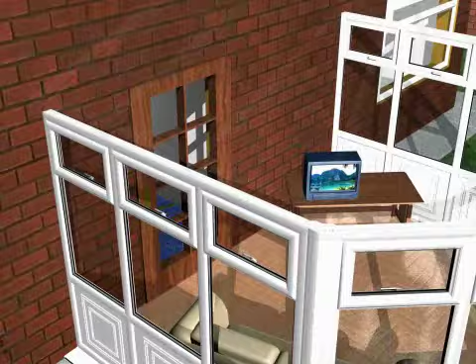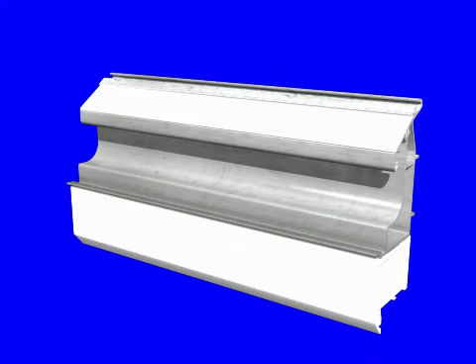The Global conservatory roof system has been designed to suit all PVCU profiles available on today's market. The flat base on the eaves beam will sit directly onto any outer frame section between 58 to 70 millimetres. The eaves beam is sculptured, producing an exceptionally robust product capable of withstanding all design and loading situations.

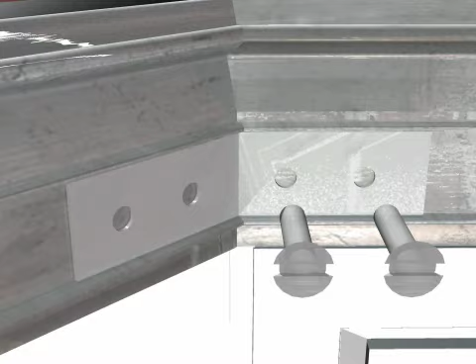Once this box section has been screwed onto the walls of the conservatory, the corners are securely fastened together with the specially designed fixing cleat.

The global ridge component enables all pitch variations between 15 and 35 degrees without the requirement of additional components. When the ridge arrives on site, there's no assembly required, with the exception of the cappings. It simply locates ready to receive the glazing bars.

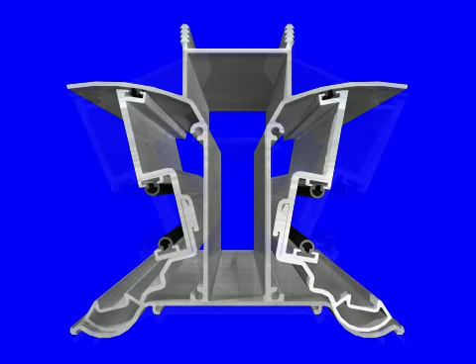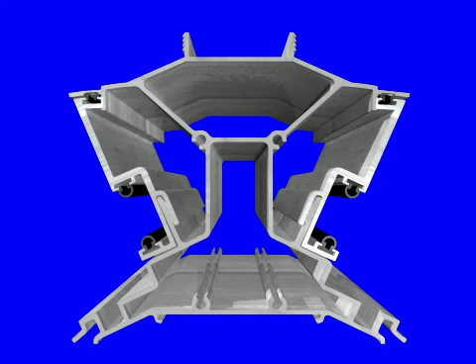Due to our extensive experience in the conservatory market, we've identified that the vast majority of conservatories are on a 25-degree pitch. The Global conservatory roof system also boasts a fixed ridge section to make the fabrication and installation of this product even simpler.

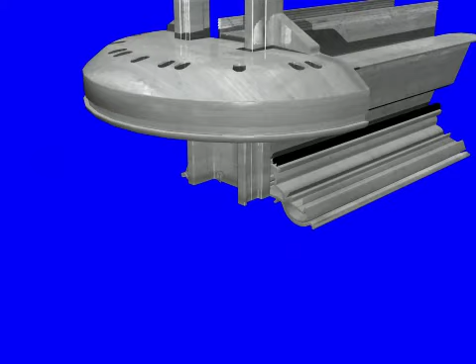The aluminium radius end, spider, is equally effortless. Not only does the same component house the hip bars on any pitch and any style of conservatory, but the precast location grooves eliminate the necessity to drill this component at either fabrication or installation stage.

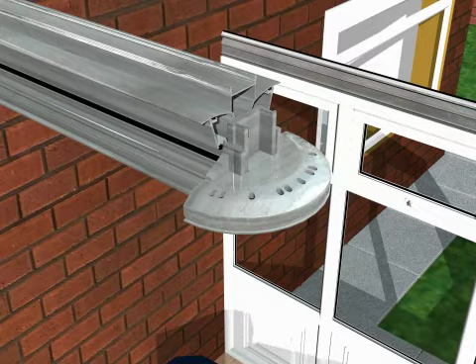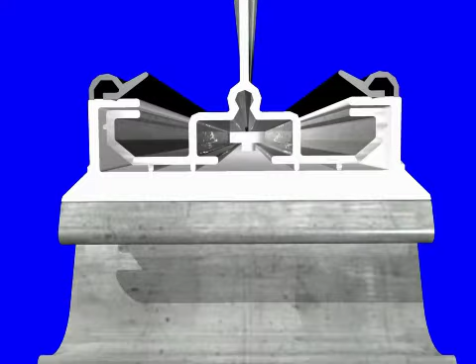Once the beams have been positioned, locking off is simple. The installer simply fastens one nut to the top and bottom of each beam from inside the conservatory, again eliminating the necessity to physically climb on top of the building and reducing installation time still further.

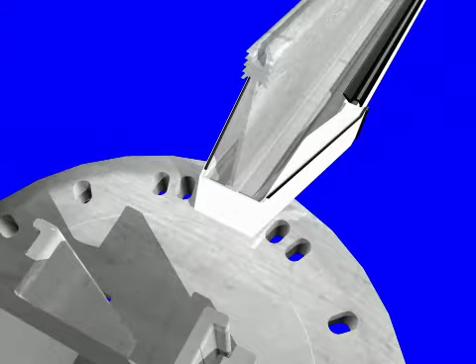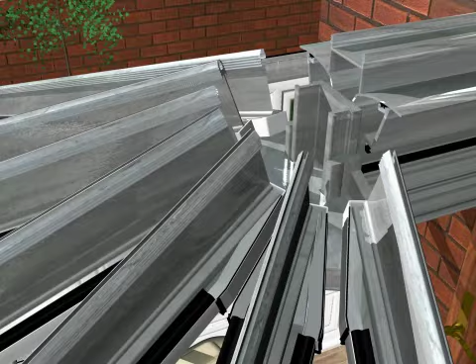As the ridge and radius end both house a location groove, the major benefit is that the installer can locate the glazing beams into the ridge and radius from floor level, meaning he does not need to climb up onto the half-built conservatory to position the beams. This central bolt slot on the glazing bars also eliminates factory or site drilling into the aluminium section, cutting down even more time and cost.

Once the beams have been positioned, locking off is simple. The installer simply fastens one nut to the top and bottom of each beam from inside the conservatory, eliminating the necessity to physically climb on top of the building and reducing installation time still further.

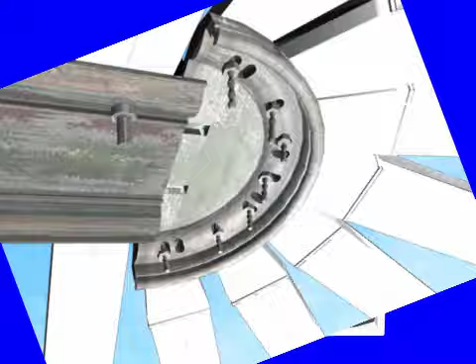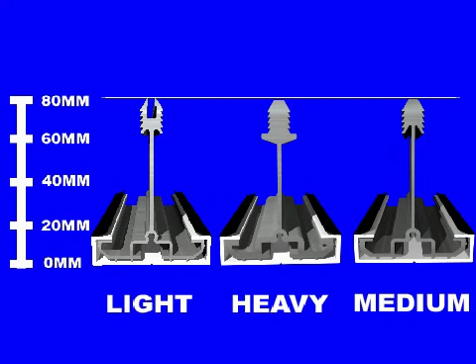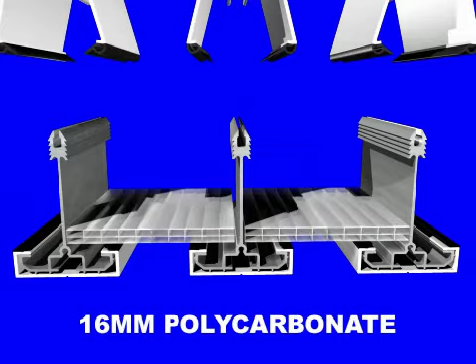Glazing beams are available in 3 different weights: light, medium and heavy, with an additional underbar bolster for the extreme. This range of aluminium weights ensures cost efficiency for all size conservatories. The height of all gauges of rafter are a universal 80 millimetres, allowing for cross-utilisation within the same building if required. Polycarbonate depths of both 16 millimetres and 25 millimetres can be utilised within the conservatory system. The global roof can also accept glass panels when required.

Because this roof offers a specific jack rafter section, a sculptured top cap on all glazing bars can be used without complicated milling procedures at the jointed section. The top of the jack rafter stops at the bottom of the sculpture on the hip bars.

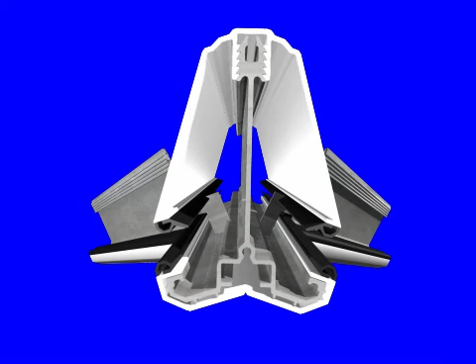The easy technique by which the rafters locate to the ridge is replicated with the jack rafter assembly to the hip bars. The simple spring hook design enables the quickest of installation times once again.

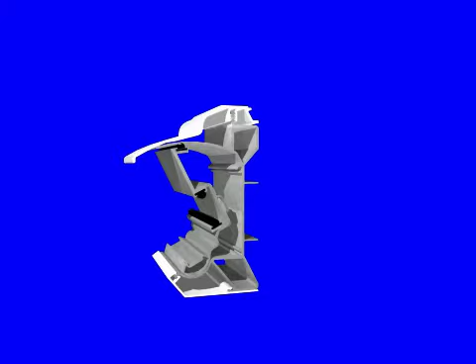A global wall plate is an exact 50% replication of the ridge section. This means that the benefits incorporated within the ridge component are carried directly into the wall plate. Because of this, all P-shaped conservatories can be fitted retaining continuous sightlines along the ridge and wall plate.

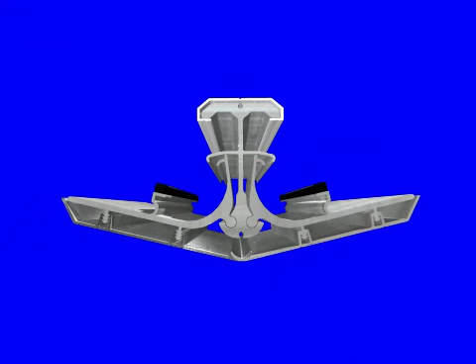The valley gutter is capable of producing all popular pitch and angle variations without jeopardizing either the weatherproofing or structural integrity.

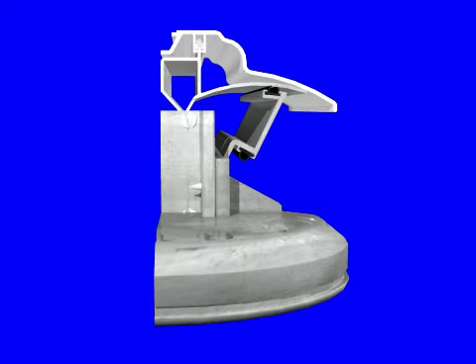The radius end product demonstrated earlier on the ridge section offers the versatility of being able to double in both half-spider and full-spider conservatories. Screw ports in the wall plate have been positioned to fix a split radius end for the quarter-spider installations.

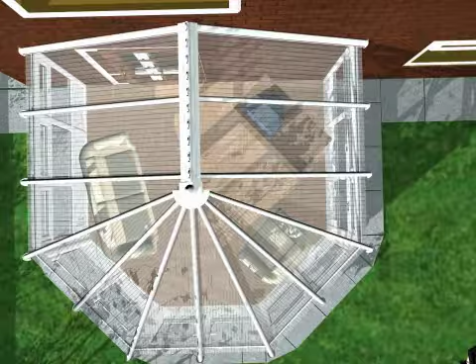When a conservatory roof pitches towards a wall, it does of course necessitate a box gutter system. The Global box gutter duplicates the shape and size of the eaves beam entirely, resulting in a seamless internal joint. The sculptured non-handed gutter system does not stop to meet one of the myriad of box gutter jointing adapters. It simply runs straight into the universal box gutter adapter.

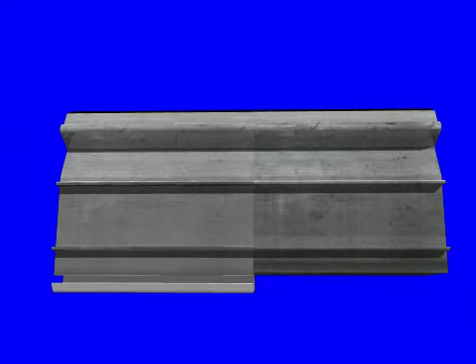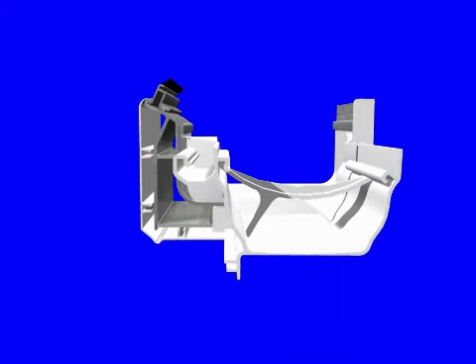This design enables the use of standard gutter angles to be used where the box gutter meets the conservatory gutter, whilst the high-capacity box section can carry water from both the conservatory and house roof. The box gutter also incorporates a twin-layered aluminium base, ensuring that at no time does rainwater actually come into contact with a single skin of aluminium to the inside of the conservatory, which would increase the risk of internal condensation.

Occasionally, high internal edge box gutters are required, at which time antiquated roofing systems need to cloak the welded high internal edge with foam trim products. The Global conservatory roof does not require these third-party products to produce the required finish.

The box gutter underclad is designed to interlock into both itself and also the eaves clad, meaning the perfect finish can be achieved upon any height.

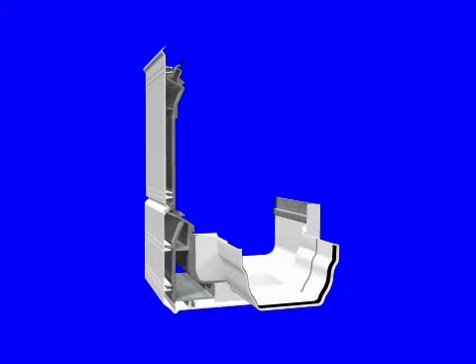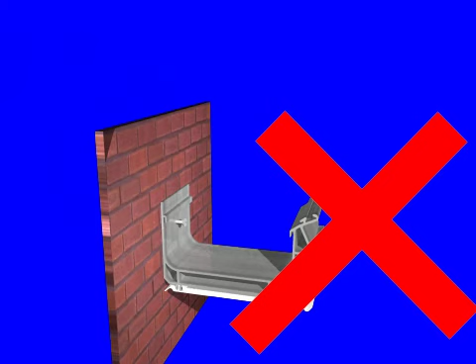Historically, box gutters have been fixed through the external skin of the box section. This not only produces extra leak points, but, as you may already know, causes many headaches for the installer trying to drill and apply a fixing at such a tight angle, especially with a high-edge box gutter situation.

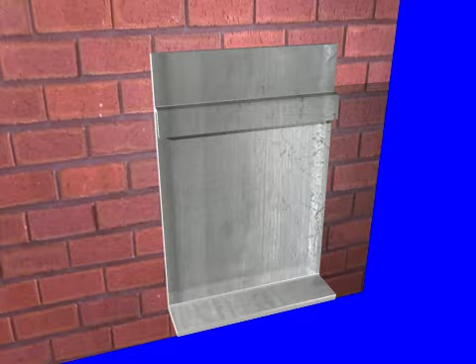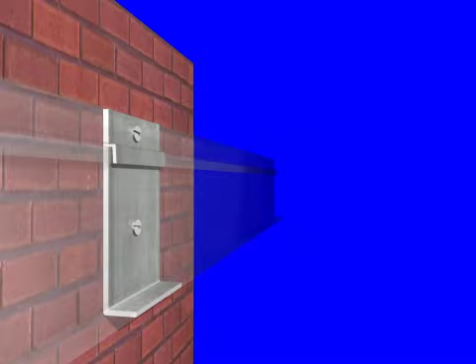Global has challenged many typecast methods, one of the results being a box gutter fixing plate. The plate sits on top of the frames while simply being screwed directly to the wall in as many locations as necessary. The box gutter then clips into this plate with a simple securing screw from beneath. Far quicker and easier to install, whilst producing a box gutter without holes and less leak potential.

Polycarbonate sheeting is fitted into a triple gasket seal at the ridge and sits on the top of a double-sided security tape polycarbonate support trim between the glazing beams. The caps are then simply tapped onto the aluminium glazing beams.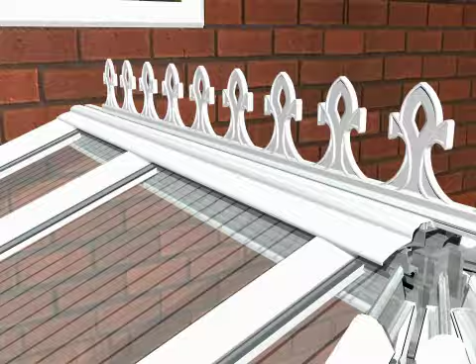Once the interlocking cresting has been slid into the deep internal recess, the wide thread under the finial is securely located into the radius top cap. At no time do these products penetrate these claddings, increasing the risk of water penetration.

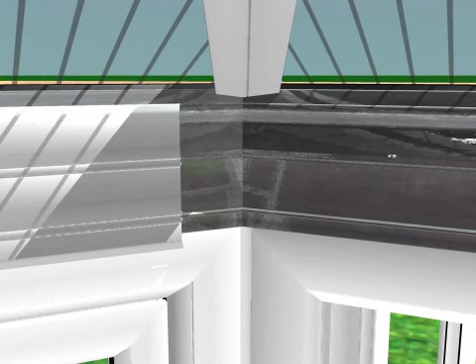Eaves beams are cladded by pushing the trim into position and simply slotting into specially engineered corner mouldings. These provide a dry seal without fiddly mitre cuts.

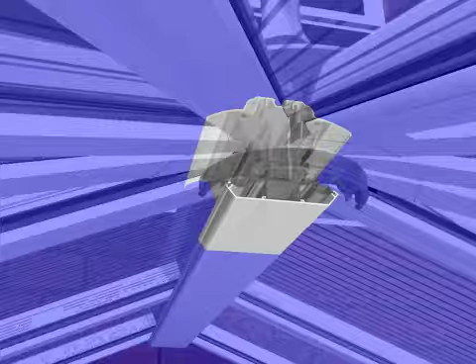The ridge bottom clad fastens in a very similar manner, cloaking both the ridge section and the intermittent U-channel that can be used for fixing tie bars, lights, fans, etc. This one underclad is designed to work on all pitch variations.

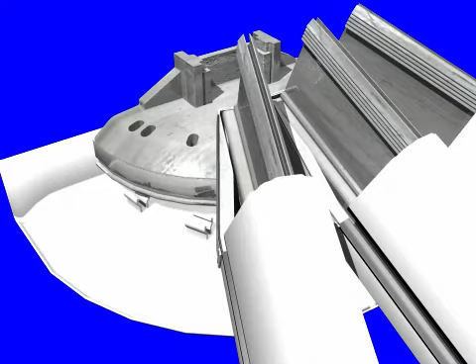Next is the radius end cap, incorporating two locating positions, one for 25 degrees and below, the other for over 25 degrees. Again, simple design techniques eliminating unnecessary products, stock holding and confusion.

Now the conservatory roof is installed, leaving only the guttering to install. This is an area frequently overlooked by alternative roofing system manufacturers, simply making their product suit a proprietary gutter brand, resulting in awkward gutter brackets and imperfect finishes.

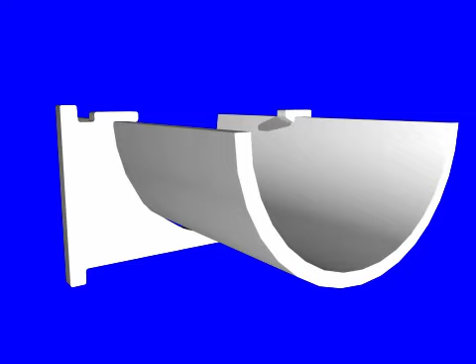The global guttering system is designed and extruded specifically to fit the global eaves beam. The unique global guttering system does not require any such brackets, as it incorporates a simple swing-fit design on the extrusion. The installer simply offers the gutter to the eaves beam at an angle and pulls it down into position.

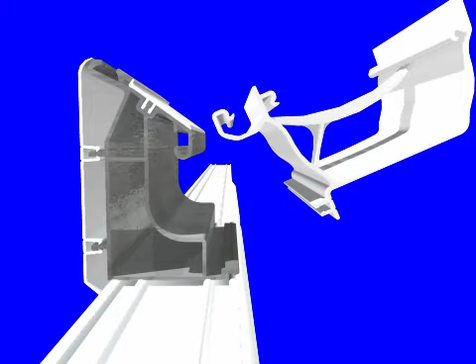Simple. This design not only increases the ease of installation, but also automatically cloaks the often overlooked area of the eaves to frame, producing a perfect finish on a component that frequently lies at eye level. Of course, this means that there are no visible gutter brackets, giving clean and continuous sightlines around the whole conservatory. The gutter then interlocks into the corner mouldings, replicating the perfect finish, even in what others consider problematic areas.

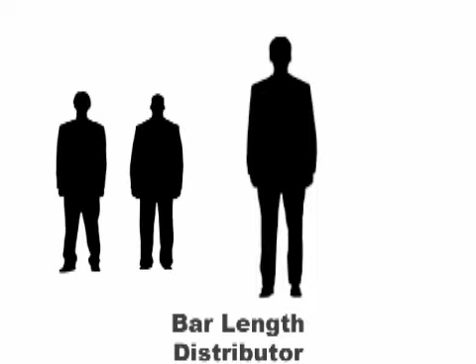Cut out the middleman and make more profit. It's one of the best known and most accurate business principles. The words of wisdom carry even more weight when you cut out up to 4 middlemen in the supply of one single product. This is how the global conservatory roof system discounts another old theory that cheap prices lead to cheap products.

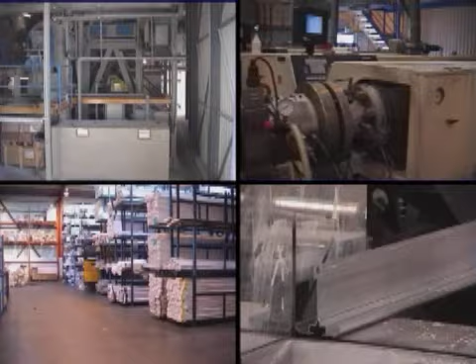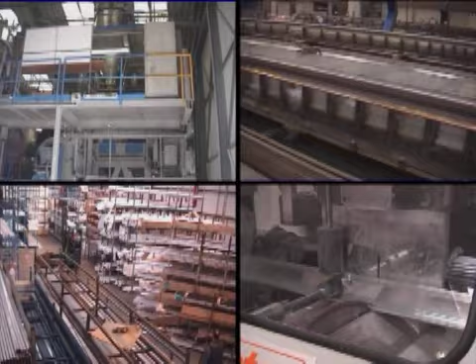Because Synseal are responsible for the blending of chemical compound, extrusion of material, distribution of bar-length material, and fabrication of a bespoke product, we're capable of producing a product of the highest quality, quite simply by eliminating the compounded margins of anything up to 4 middlemen.

Because we're self-sufficient in all of these areas, we can dispatch a made-to-measure conservatory roof on a 5-working-day lead time, which enables you to concentrate solely upon the fabrication of the conservatory walls without having to tie up cash in stock holding and other unnecessary costs like floor space and fabrication time.